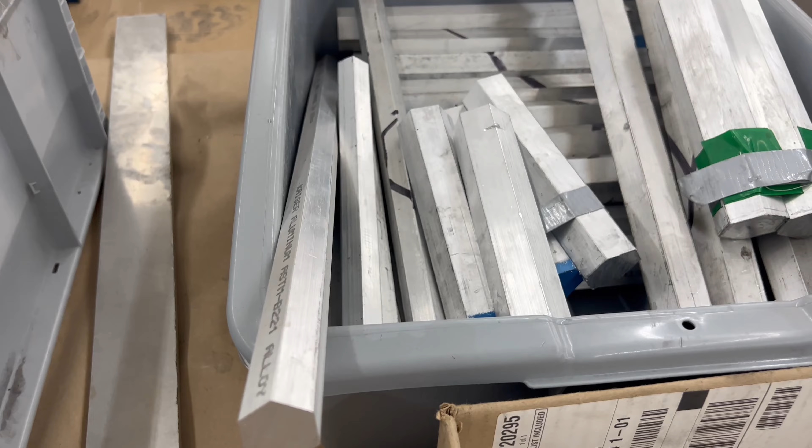Today we bring to you the mini decarb capsule, the mini decarboxylation capsule that we make, and it's so popular. Eddie's going to walk us through the process, but we start over at the saw, right? Correct. So we start off with the 12-foot bar material. It starts as a hex, like this shape here. We cut it into individual pieces just a little bit over the finished size, so we have material we can machine off to the finished dimensions.

So after our first step, we machine this hex shape here. That way we have something to grab on for the next step. And then after the next step, we hold it by this, and then we do this top section here. We cut the little pocket and all these little steps in here. And then when it's done, we get a done piece like that. So it starts from a piece like that, and we end up with that there.

So all the way through the process, you can see us on the saw here and how we cut it all into little pieces and he puts it in the jig. Behind us, Derek's actually operating the machine that's cutting the pieces, and we're going to show you that as well. But the piece is a high precision piece. It has to be because of the way that it seals. It's a little pressure cooker, the way that it works in our unit. So a very popular piece, the mini decarb capsule, and another episode of the design and build series.

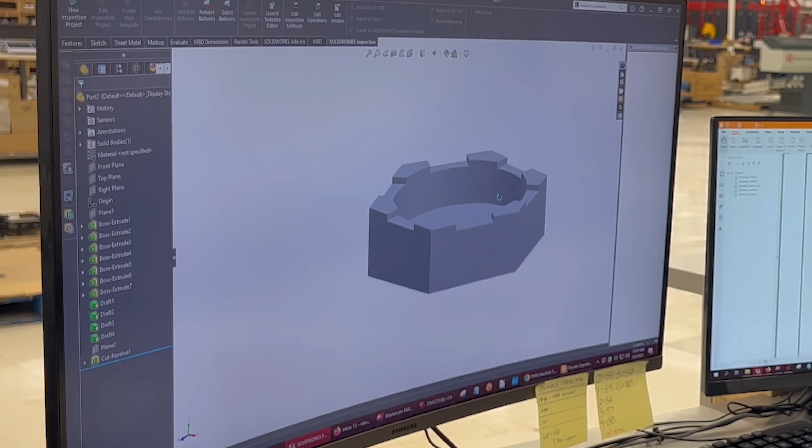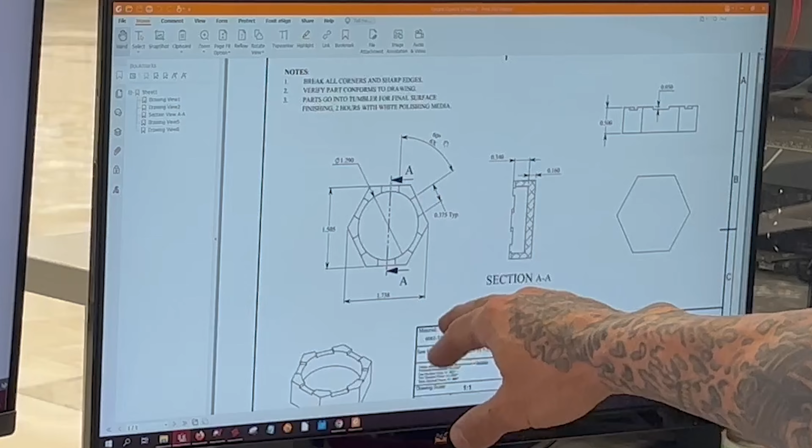All right, so we get this part from the engineering department. It comes in as a solid model in SolidWorks. So this is what it looks like. We basically have to take this and I have to create a machining drawing so that the guys know what dimensions to hold. Over here I create a drawing with dimensions and tolerances. With parts like this, everything has to fit together a certain way, so we have clearances built in that we have to hold. So I put all the dimensions in here that the guys have to keep an eye on and hold those tolerances.

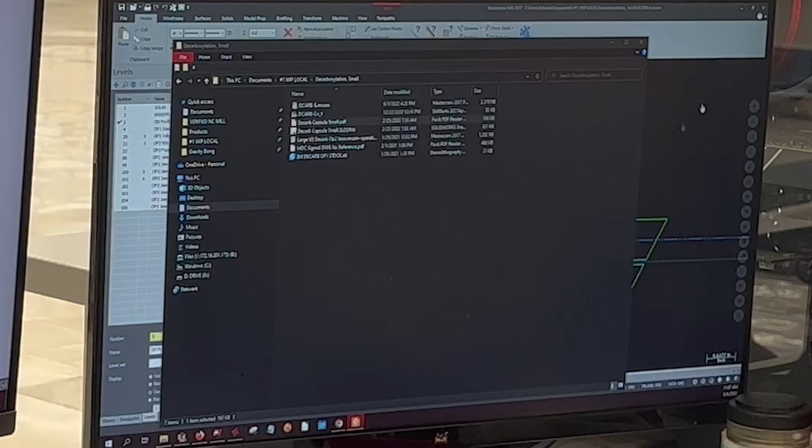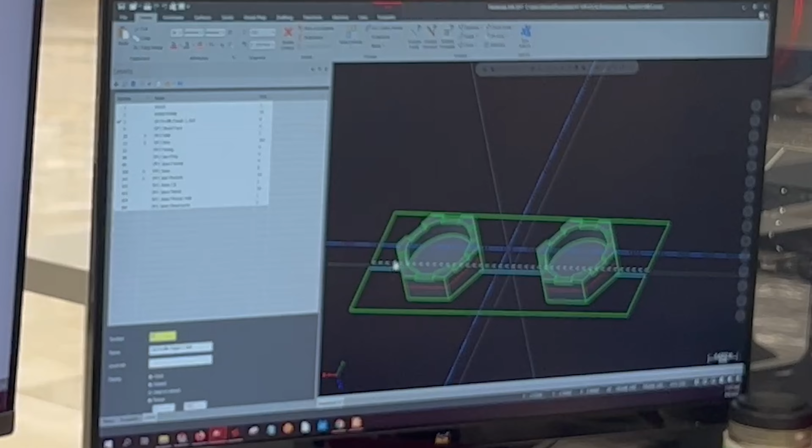And then after I do that, I go into the CAM system and I program the parts depending on what we're doing. So here I have it laid out for the second step where we're doing 2 parts at a time. We have to cut the jaws that these are held in, cut little pockets to hold them. So basically we have to tell the machine how to machine this part, what tools we're going to use, how fast to go. There's a lot of little steps in there; just this part alone there's like 8 or 10 tools to make this part.

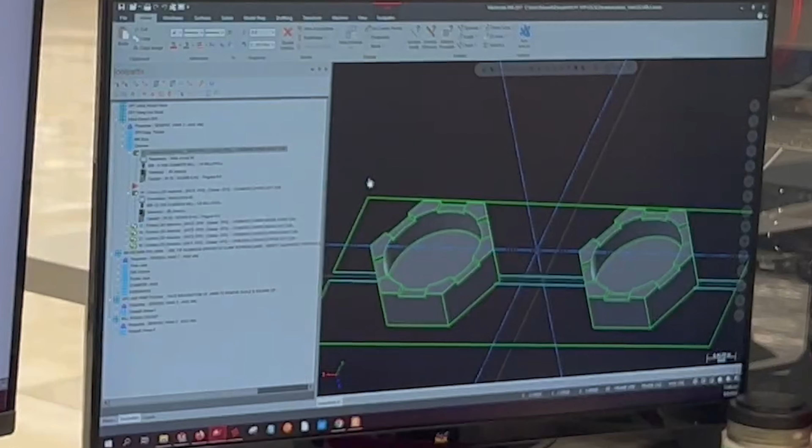So once I do that, then I can post the code. It's called G-code, and posting basically sends the code out in a format that the machines can understand. And then after that, we have to test run it, and then we can start running production. So basically when the code comes out, it looks like this. It's a bunch of gibberish to most people, but it's all the commands and positions to tell the machine where to go, what to do, what tools to use, how fast to go, and all those different variables. And that's all stuff that we have to input.

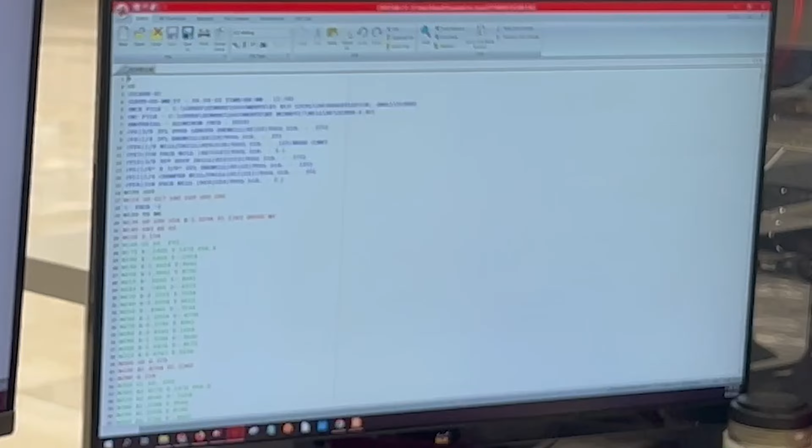People think you just put a piece in the machine and push go, but really there's a lot of steps, from the design process to figuring out how we're going to make the part to what tools we're going to use. There's just a lot of variables, and how fast to cut the part. There's a lot of different formulas and steps we have to apply for that. But that's basically it in a nutshell, how we go about doing that.

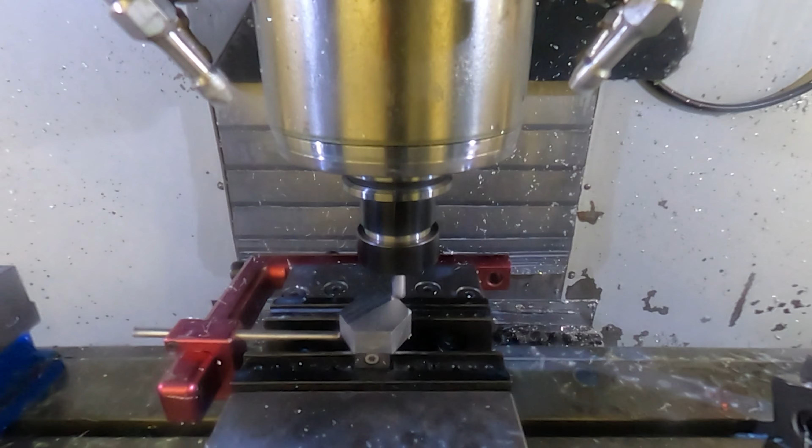So the first step we do is this first side. We face this off here and we cut this hex, because we need to establish a good surface to grab onto. That's how we approach these parts: how are we going to hold the part and how are we going to locate it for the different steps. So for this particular part, the easiest way is to face this to create a nice flat surface there, and cut this outside shape, then we can flip that over and we have something good and accurate to hold on to.

Because it has to be repeatable, everything has to be held within a certain tolerance, because if you don't hold this to a certain size, the part's going to be shifting around. There's a lot of things that can go wrong, so you really have to make sure you hold all the tolerances. Once we do that, we can flip these parts around and hold it from that area we just machined, and in this case we're going to do 2 at a time, and then we can machine all these other features on here, and when it comes out it's all done.

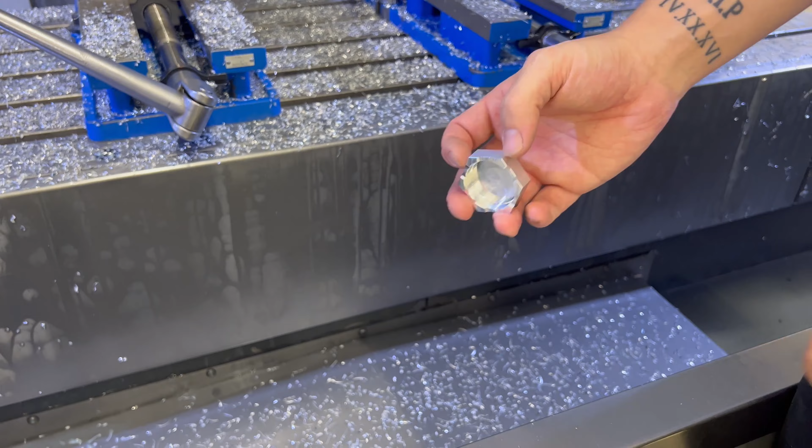Eddie, thanks for sharing with us how the actual mini decarb is built and done.